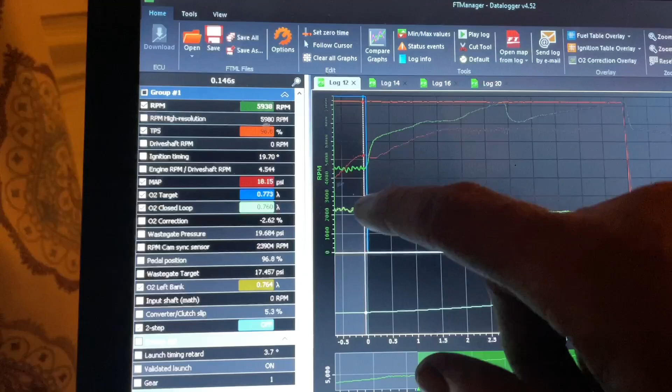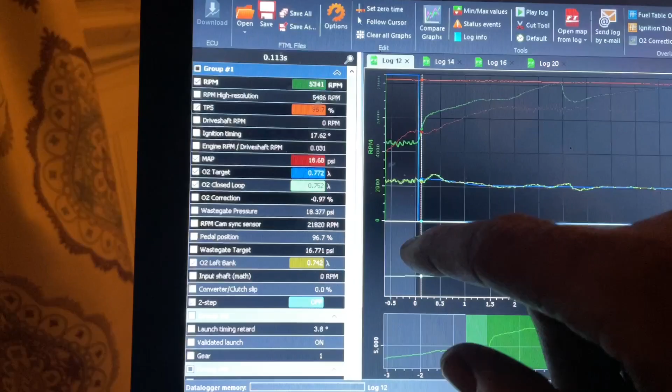All right, now I figured I'd do a little race, a little test and tune recap. So this was my first pass. I come in, I put the two-step, we left at... I let go directly at, let's see, 4,500 I left at. If you look right here, 18 pounds of boost, 18.68, 4,500, and everything looked good.

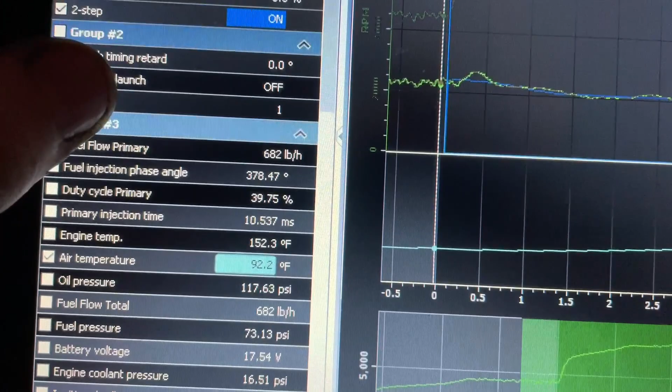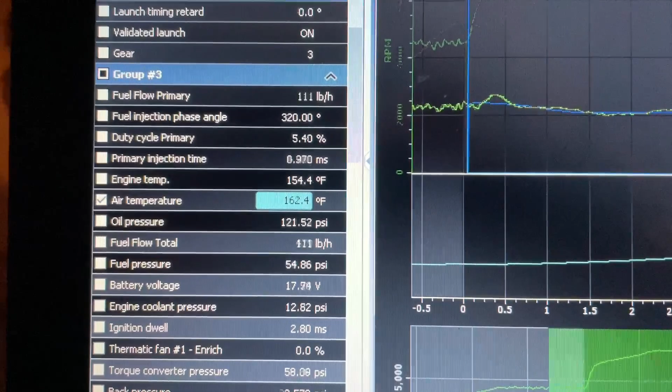So air intake temperatures, watch this, it's 92 degrees right here. See that right there? Watch it coming down the track. Wait, this ain't my first run then. Yeah, it is. Sorry, yes it is.

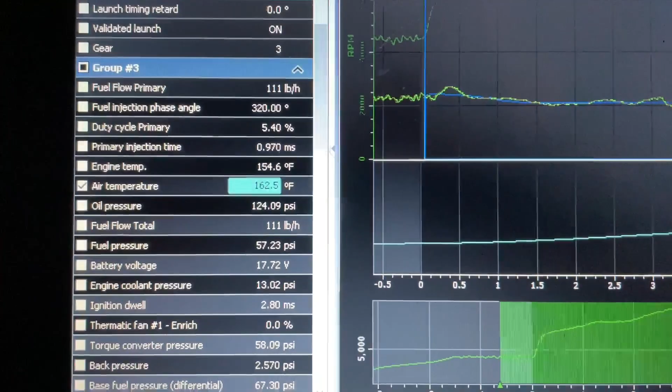Look, see the 162? I put ice in the tank. I got back around and realized we still had ice in it. So I said, well, my pump couldn't be running. Checked the pump, the pump was running. I forgot to put water in with the ice, so you can't pump ice. That's my own fault.

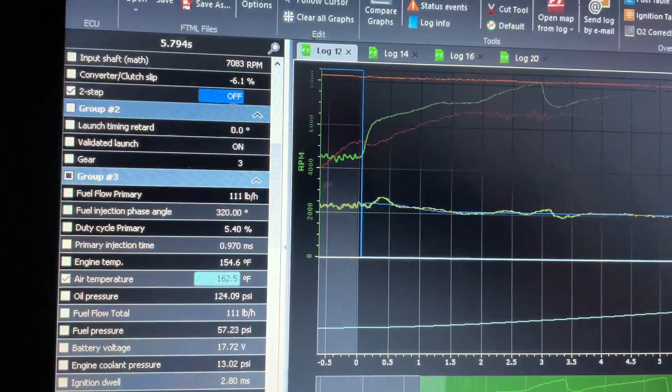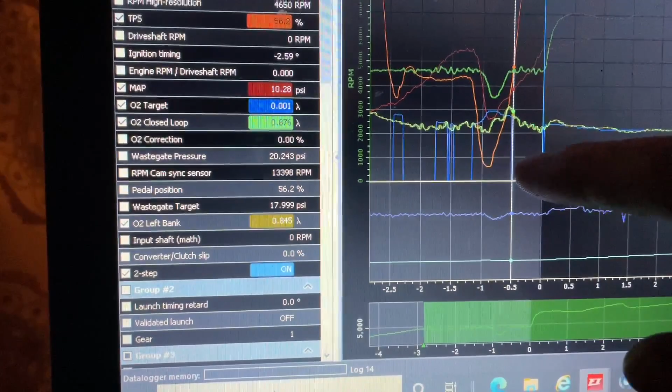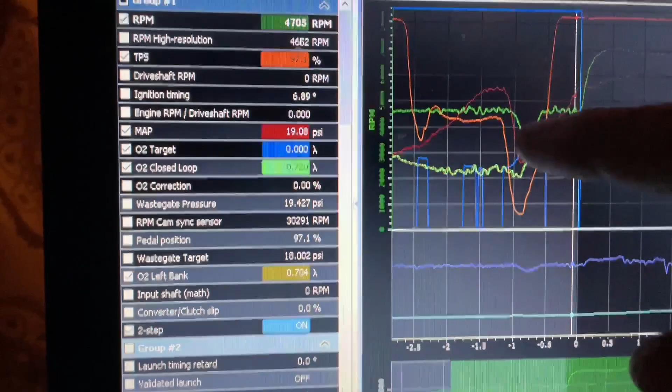So I was like, all right, the next pass I said, well, here we go, let's try. So I got up on the brake this time, and look, I was on 20 pounds of boost, 4,600. It started popping, but I didn't know if the car beside of me had pulled on in, like it was all the way in, so I let off the gas right here. That's the orange line. Come around, start letting it beat again.

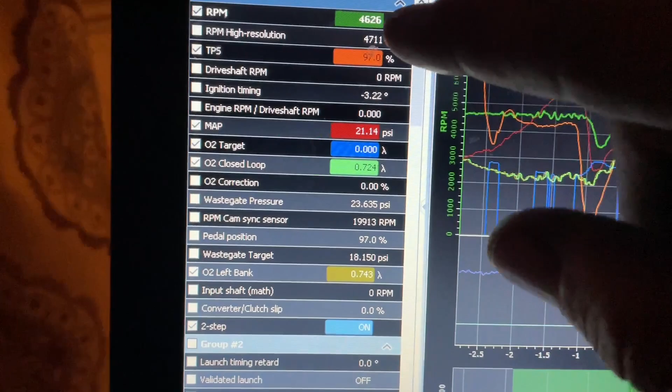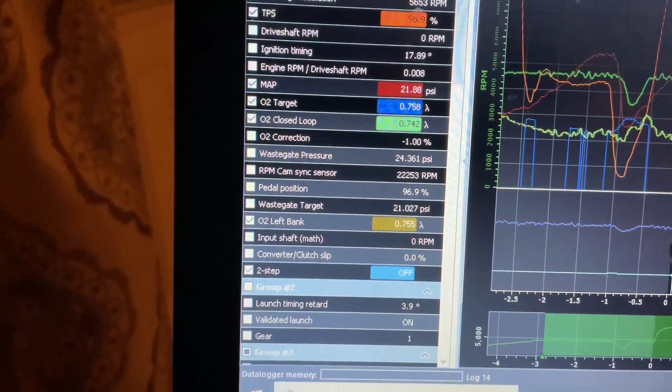It left on 21.14, well right at 22 pounds of boost. Well, 21, I thought it was 22. 21.88, so we'll call it 22. And it just went straight up.

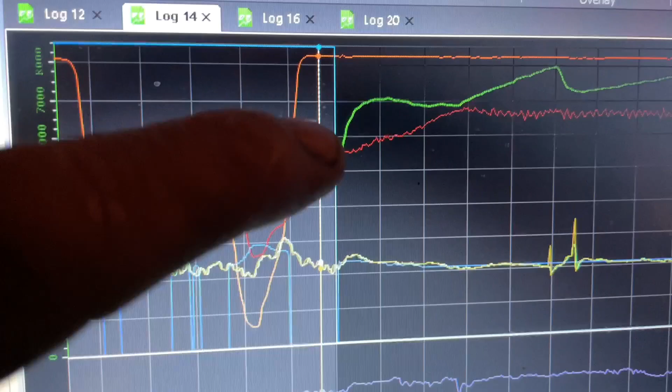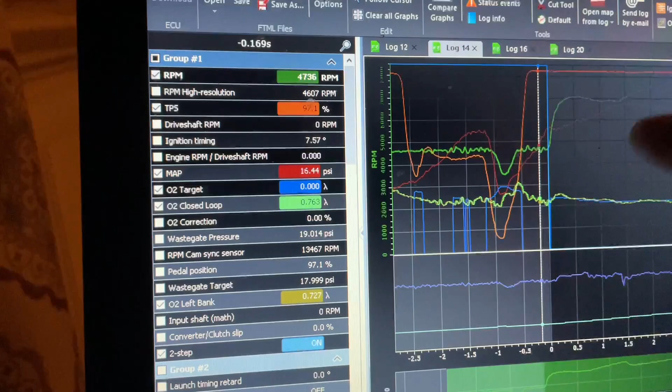Here's the boost curve, but here's what I noticed, see this line right here? The boost was headed up, and then it just plateaus over, and then it starts climbing. So I was like, that's kind of strange, because if you look, you can see it was on its way north. So I was like, you know what, this was a 5.11 pass at 140. So I was like, let's stop playing with this thing.

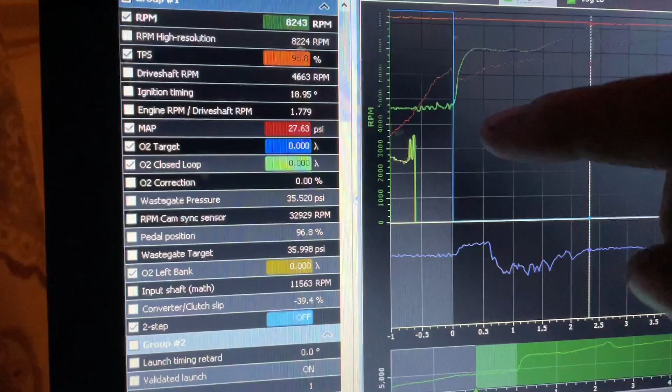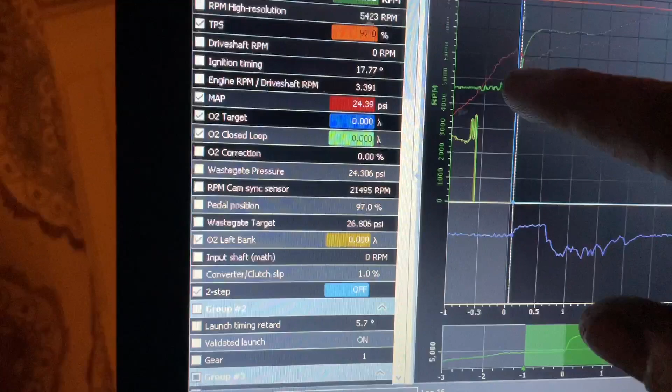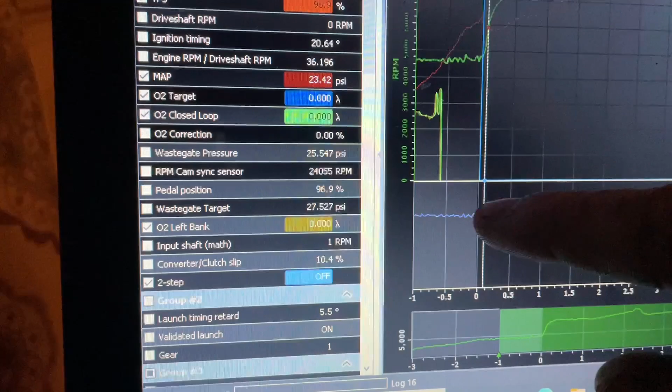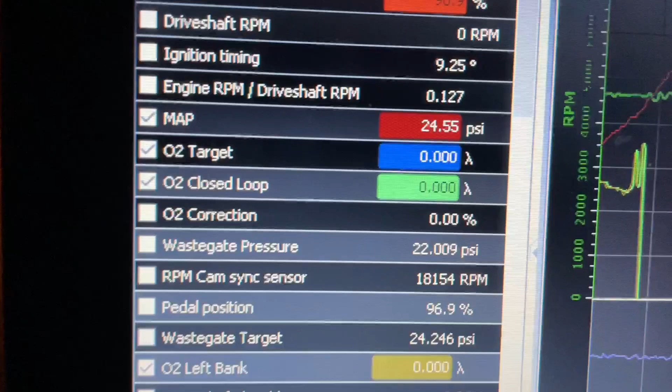So I was like, let's turn it up a little more, so I added 5 degrees on the timing. As you can tell, it pulled out to nothing, and then on the hit it was adding 6 degrees is what it ended up adding. And we left on 20, right at 24 pounds of boost. We made 25 right there on the brake. 24.55, 4,700 RPMs is where it was lit.

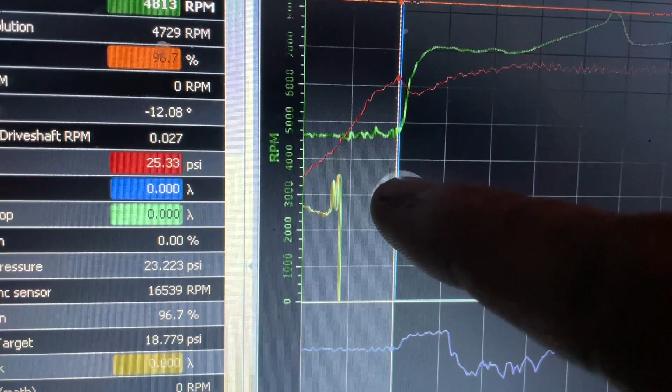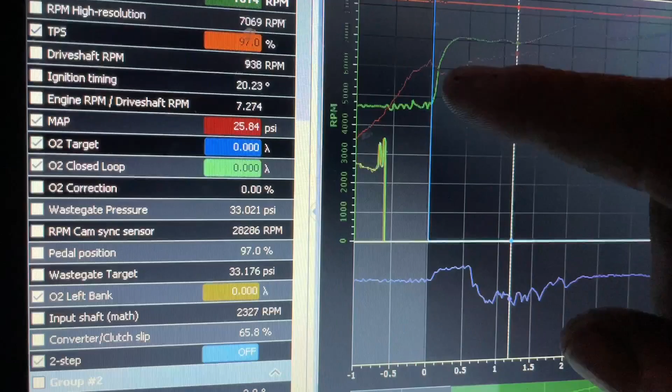That's dead on where it left at. But if you notice, look right here, here's what I noticed: first, if Nigel didn't have such a good tune in it, it would have probably blown up because my O2 quit working. But if you look right here, see this red line, the boost curve, look how it drops down. So after it done that, this pass right here was a 5.02 at 141 mile an hour.

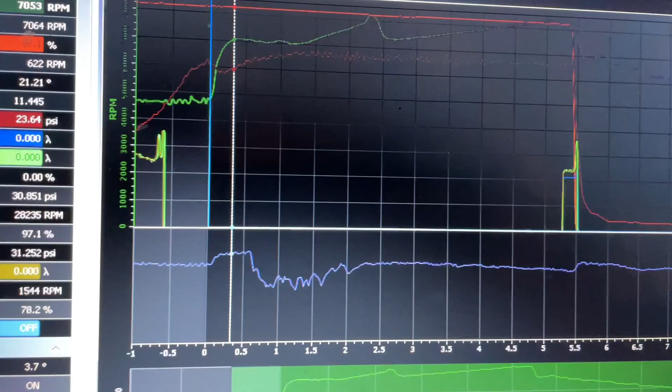This is almost a PB for me. And like I said, we're having to leave on a ton of boost. If you watch, the converter climbs straight to 7,000, and then it kind of couples. So I know we're having converter issues, because it shouldn't just shoot straight up like that.

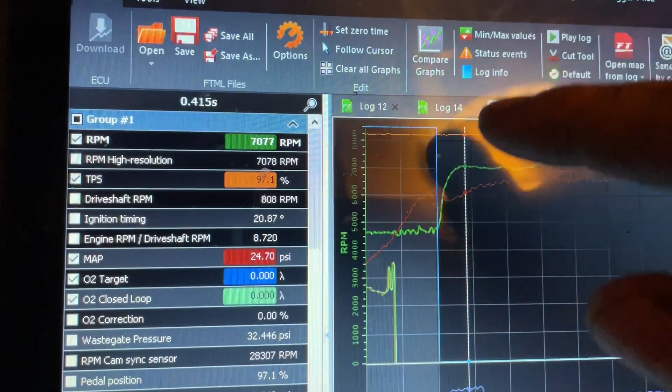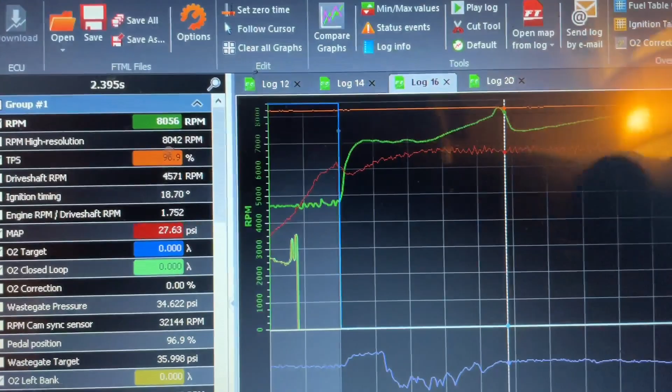So we had to get that checked out. It comes up and then it plateaus over. But I shifted it dead at 8,000 like it was supposed to, and we crossed the traps. If you look right here, we crossed the traps at 83.43.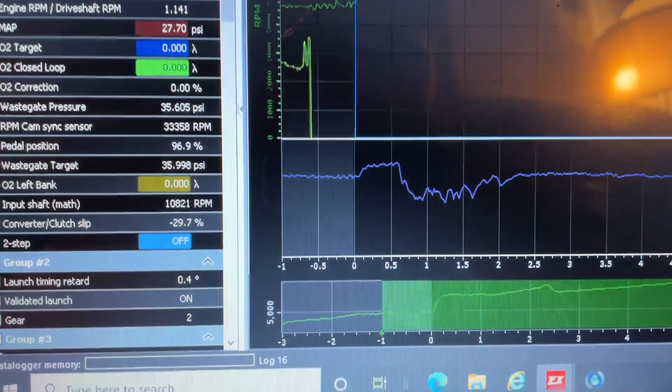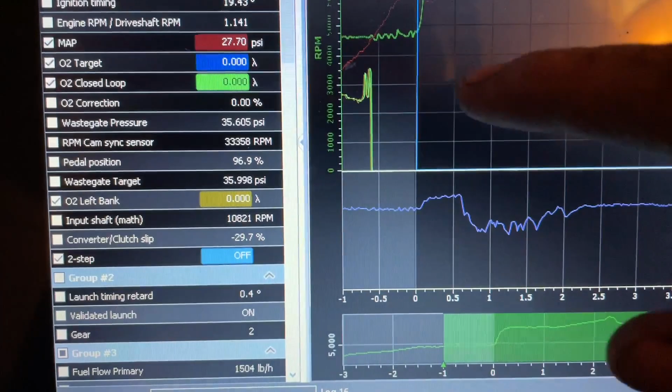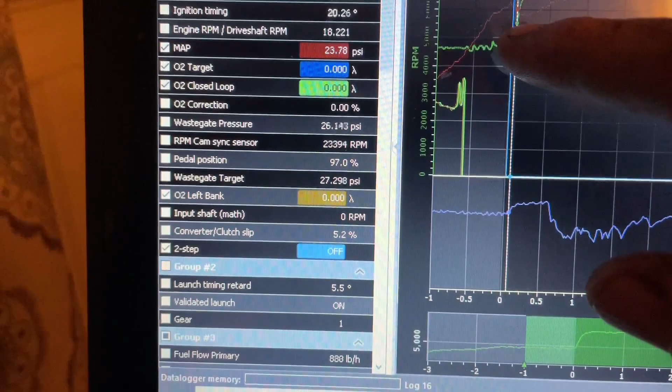So I think that might be a little bit off. It's showing converter slip as 30%. So we got something going on here with the converter, let's see what it slips on the leave. See on the leave right here, it slipped. I'm gonna call converter people tomorrow, talk to them. But on the leave, it's 98.4, see right there, 98.4 on the leave it slips, and then it comes on down.

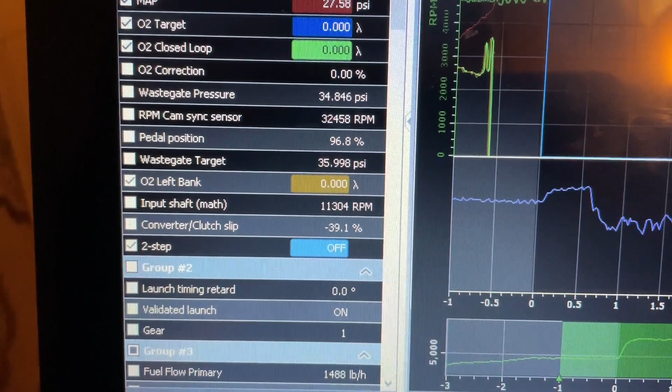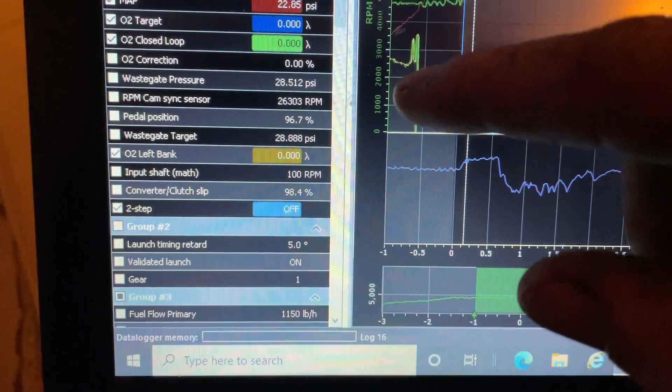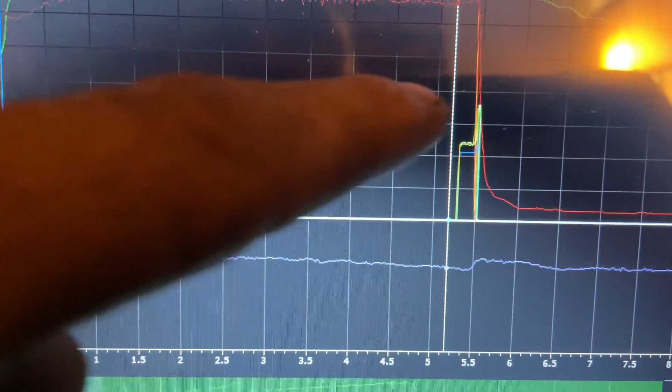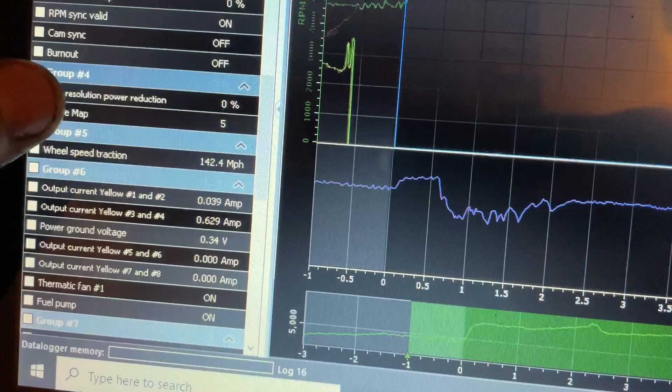Well, then it goes negative. So it's saying negative, well that's positive. Well, it says, I don't know, that might be wrong about that. It says 98% slip, but then over here it says it's negative, which means it would be not slipping, I guess. But that don't make no sense on the RPM versus the mile an hour, because it was 8,300, and the mile an hour was 142 right there. I think I'll have to do the math to see what the converter slip is.

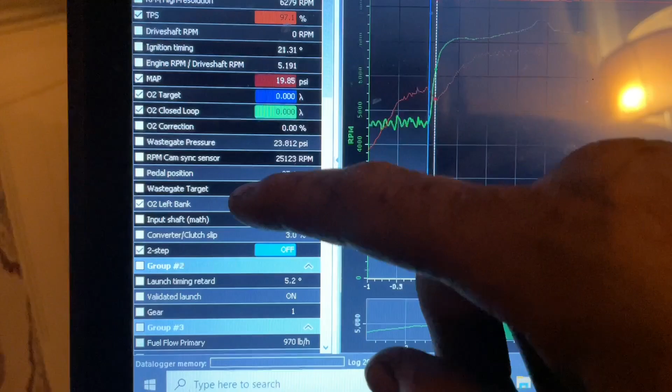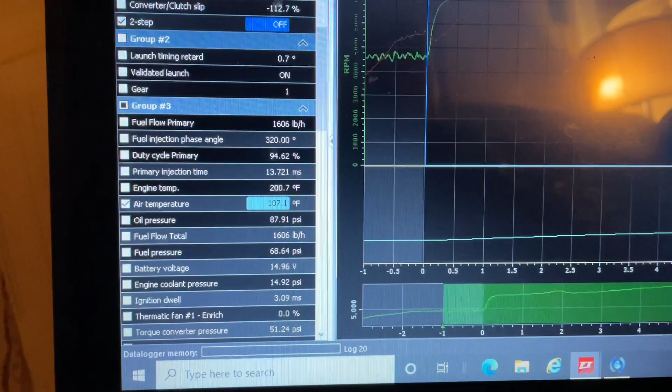So I said, well, heck with it, we're going to run one more time and try going for that 4.99 pass. So I come around, the ice that was in it was in it, I didn't have a chance to change it out, but look, it still was only 108 degrees. Oil pressure's down a little bit, I got rear main seal leaking too. Of course, the motor was a lot warmer.

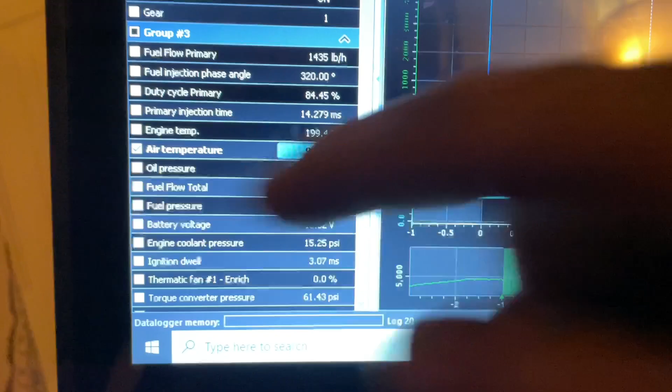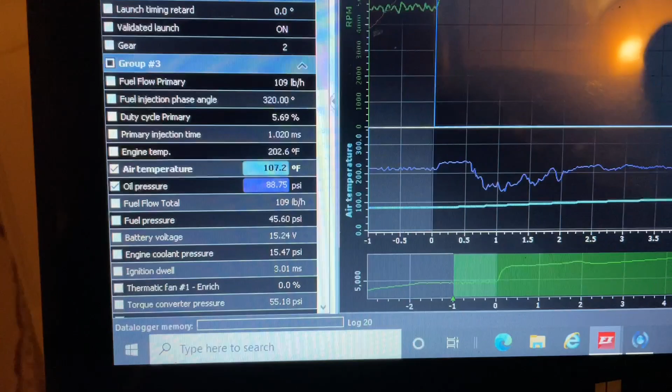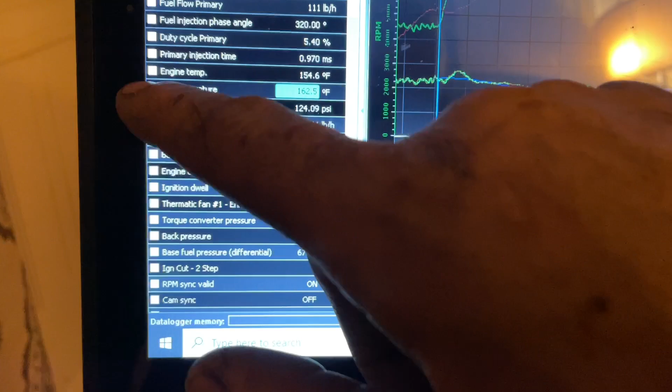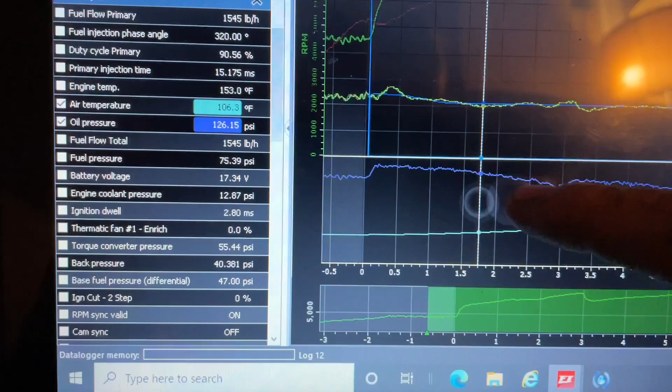So it has a little dip right here. I noticed the oil pressure was dipping back on the hit, and then coming back up and down, so we're gonna check that out again. Hopefully we don't have no freaking problem, see right there on the first pass, let's look at it. See, that's about normal right there on the oil pressure, 130, 120, that's about normal, kind of straight.

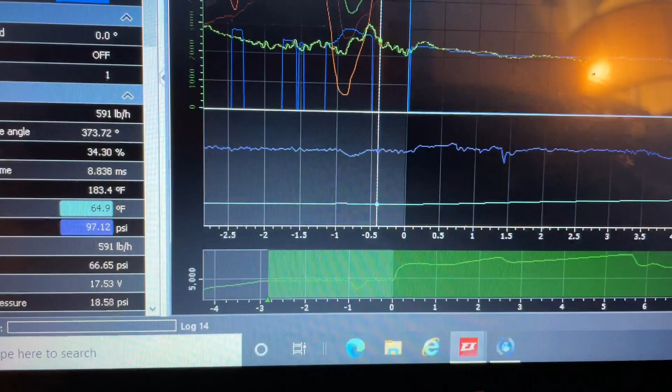On these runs where it started 60-footing good, it started dropping back oil pressure on the hit itself. So we'll look into that a little bit deeper, it might need some more oil in it, but we'll get it figured out.

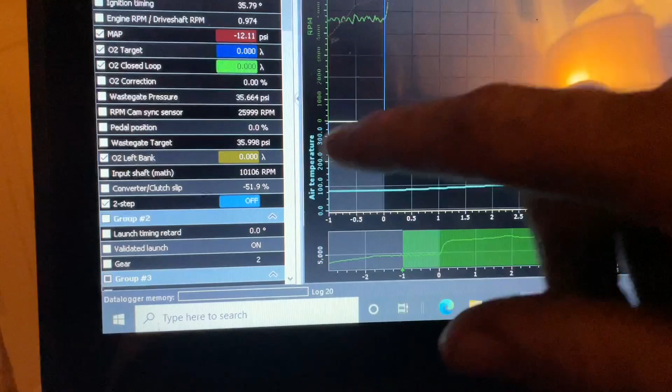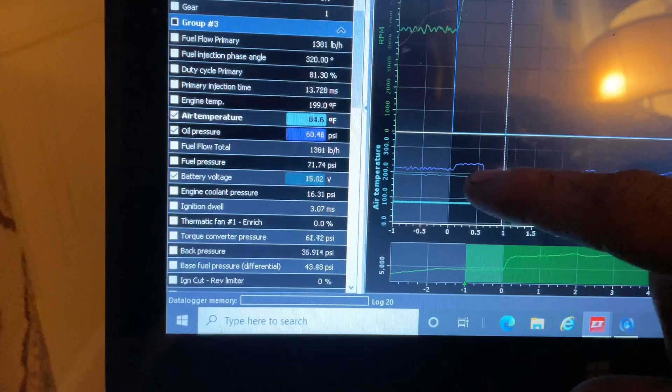I noticed on the last run too that when I got done, my battery voltage had dropped. Let's see right here. My battery wasn't even charging the whole last run. So that's something else we're gonna have to check, let's look at the run before it. It wasn't working on that one either. So we got something going on, I have to figure it out.